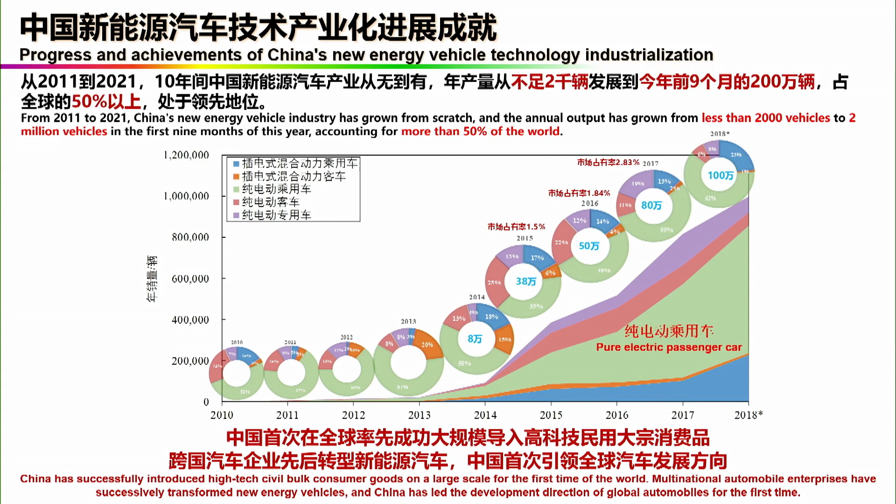So this is what is happening nowadays, and people will ask several questions. The most important question will be how does this happen, or why can this happen in China? What's the internal logic or reason for this? The second question may be, will these successful experiences also be effective in the future for China? And will they be learned or used by other countries in the future? These are very interesting and important topics, and tonight's lecture was prepared facing these three important questions.

Okay, so let's come to the first question. How does this happen? How did new energy vehicle technologies in China develop so quickly? The story goes back about 30 years. In 1992, the first proposal to develop new energy vehicles was made by Dr. Qian Xuesen, who is known as the father of the Chinese aerospace industry. At that moment, he was very interested in developing China's automotive industry. He wrote a letter to the central government to explain why China needed to develop new energy vehicles, electric vehicles, and why this is a chance for us. But at that moment, China didn't have the conditions to develop this technology.

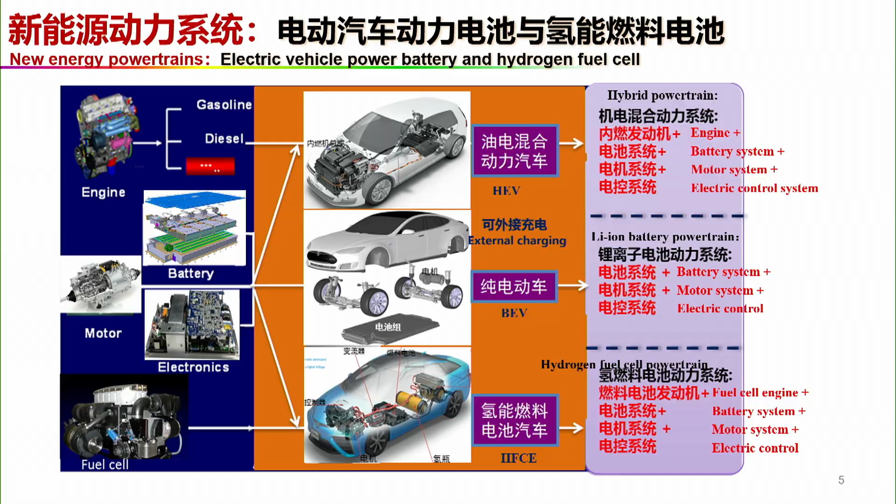In order to answer this question, the central government started several 5-year projects, starting from 2001, corresponding to the 10th 5-year project. After two 5-year projects, at the end of the 11th 5-year project around 2008, all the different kinds of new energy vehicle powertrains were developed and demonstrated in the Beijing Olympic Games. There were hybrid city buses, hydrogen fuel cell buses, and also battery electric vehicles.

All these technologies were compared with each other, and the cost, durability, and reliability were evaluated for market feasibility. At that moment, the results were not very good, because as research projects, all of these had very good results - we can say all the research projects were successful - but it was not mature for market introduction.

The only hope was in battery electric vehicles, because for some other technologies there were very big issues, like hydrogen fuel cell: the cost was still too high, and the durability was short. For internal combustion engine hybrid technology, it needs fuel consumption and cannot achieve zero emission. So the only hope relies on battery electric vehicles.

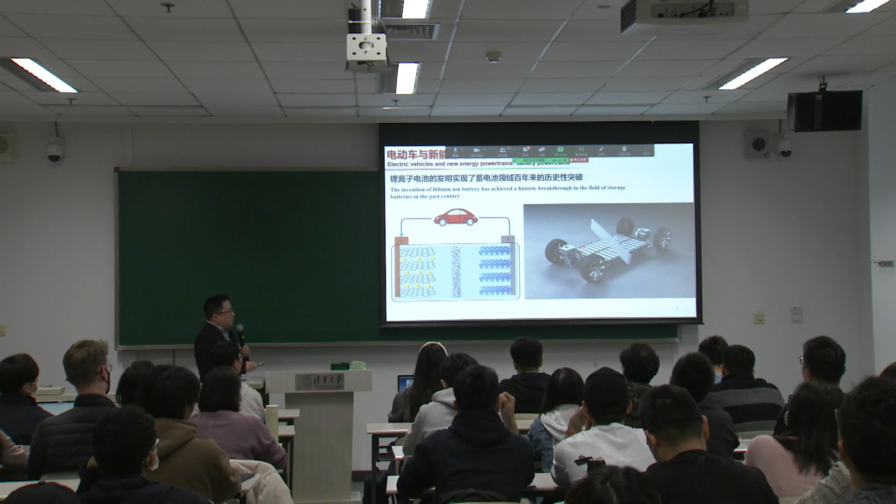On the other side, for battery electric vehicles, the development of lithium battery technology goes very quickly. Here is a video provided by General Motors, and we can see this lithium battery - this is a single cell. Lots of single cells compose a module, and this module can be integrated with the vehicle chassis very well. This technology makes the design of the vehicle very flexible, and also the performance of the vehicle very good. So we can see that the invention of the lithium battery has achieved a historical breakthrough in the field of storage batteries in the past century.

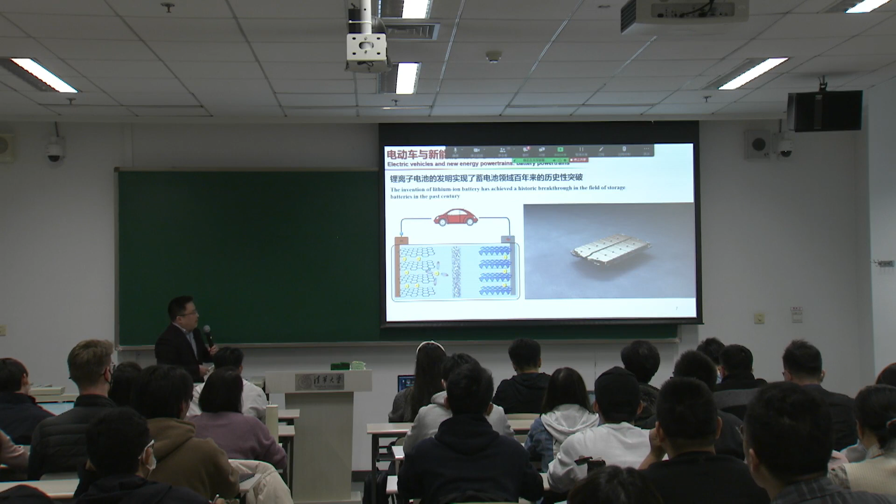This makes it possible to develop new energy vehicles. So in the year 2009, the consulting expert group made several discussions and decided to focus on pure battery-driven technology, which means if we want to develop new energy vehicles, the first or highest priority should be focused on lithium battery and its corresponding pure battery-driven technologies. After that, if we have this very good lithium battery technology, then we can develop hybrid internal combustion engine vehicles, and then hydrogen fuel cell vehicles.

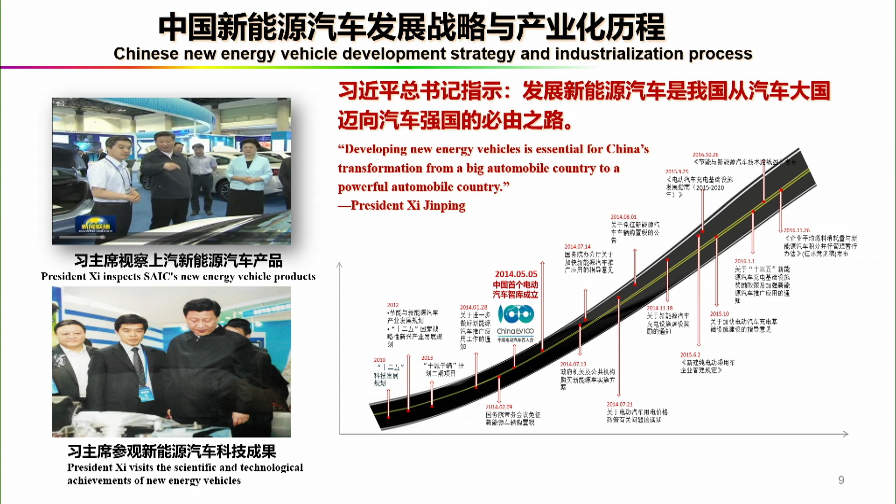This is the decision made in 2009, and after that, the central government and lots of local governments - that means the government for each province or city - provided lots of policy support to support the development of new energy vehicles, especially lithium battery and battery electric vehicles. Then this technology developed very quickly.

Nowadays we can say that in China we have entered the era of electric vehicles, and the development process can be described as starting from two ends, and then going into the market for high class passenger cars. So the market of the electric vehicle can be separated into three parts: one is the large size urban electric vehicles, and the other is the micro-sized passenger electric vehicles.

And for these two parts, Chinese companies have our own advantages, and the competition in this area is not so high. So we suggested the companies enter this market first, and after accumulating experience in technical development, then enter the medium and high class passenger car market. Nowadays in China we see many high performing electric vehicles, such as those provided by XPeng, SAIC, BAIC, Xiaomi, Lixiang, or Weilai. So we can say this strategy has had a very successful result.

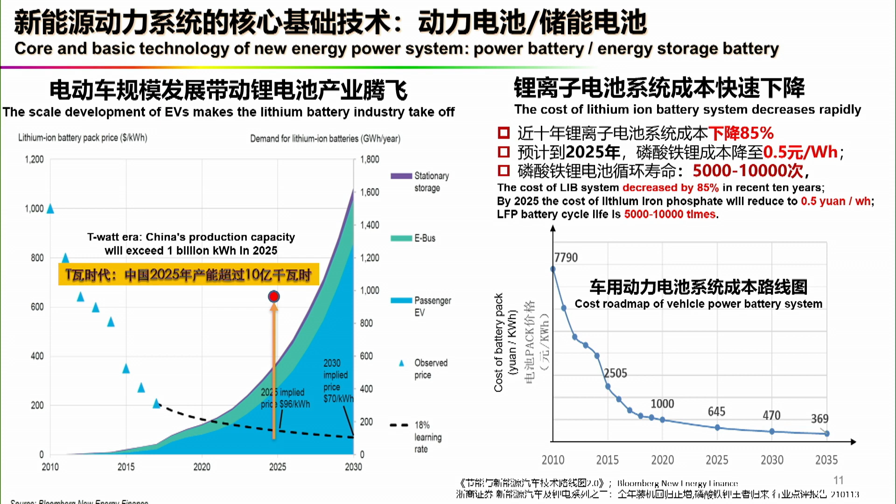Not only has the cost reduced by a very big gap, but also the energy density increases very rapidly. The energy density of the lithium battery itself increased from less than 100 watt-hour per kilogram to more than 300 watt-hour per kilogram. And at the system level, the specific energy increased from around 40 watt-hour per kilogram to about 200 watt-hour per kilogram. This technical development is also amazing.

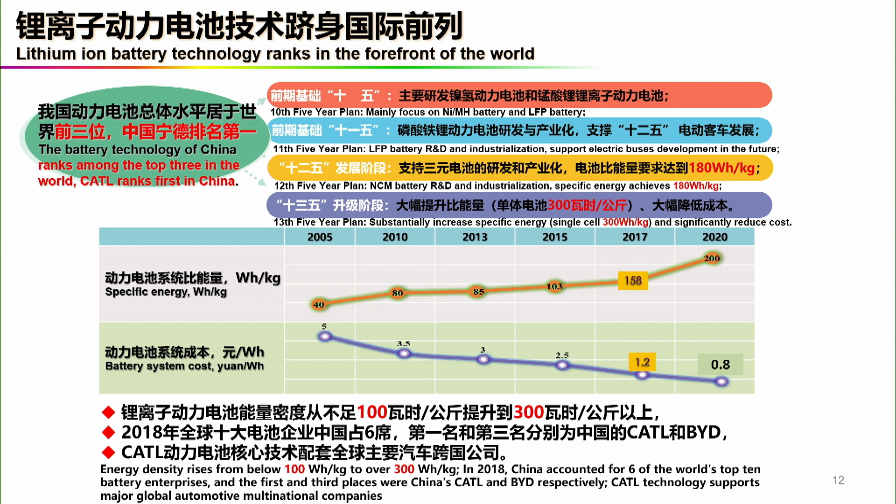So overall, we can say that the battery technology of China nowadays ranks among the top 3 in the world, and the company CATL in China ranks actually first in the world in the battery industry. So this is the achievement of the battery industry.

When we look into the key technologies, or the scientific issues of the lithium battery itself, we can see that the performance for mileage and life have been basically solved. Nowadays, the driving mileage of electric vehicles generally locates around 300 or 400 kilometers up to 500 or 600 kilometers, which fulfills the requirement of daily use.

But there are still several issues that need to be solved. One is thermal runaway for the safety problem. The other is the driving range decline problem in winter. And the third is super fast charging - how to charge this battery very quickly. So our research is also focusing on these several aspects.

When we look into the research methodology, it is also very interesting. At the very beginning, before 2015, almost all researchers in university as well as industry focused on improving or optimizing the material of the lithium battery, so lots of research and development work focused on the material. But after 2018, engineers and scientists changed their viewpoint and started to improve performance from the structure level - combining knowledge from mechanical engineering, electrical and electronic engineering, together with material science, to make new innovations.

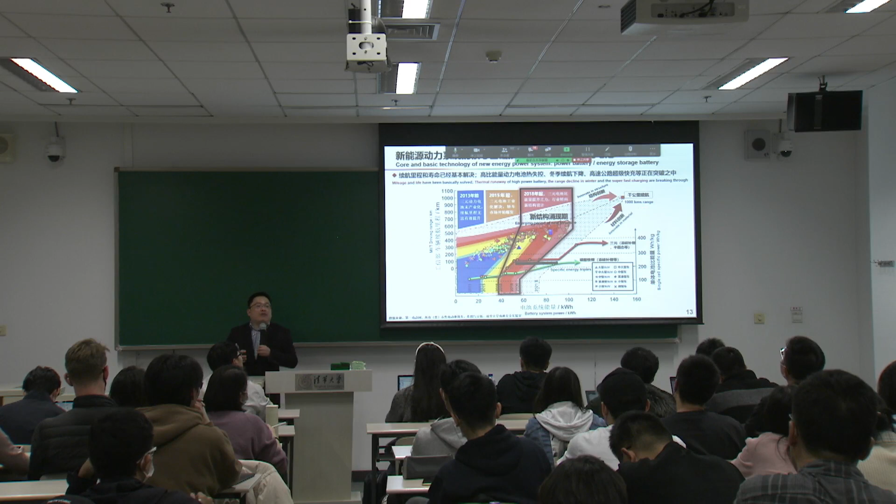Nowadays, almost all research groups and companies use a multidisciplinary research method - using not only material science but also mechatronics systems and artificial intelligence technologies to develop high performance battery systems. The target is to realize a battery system that can guarantee a passenger car providing more than 1,000 kilometers driving mileage, as well as guaranteeing thermal runaway safety and reliability in winter time.

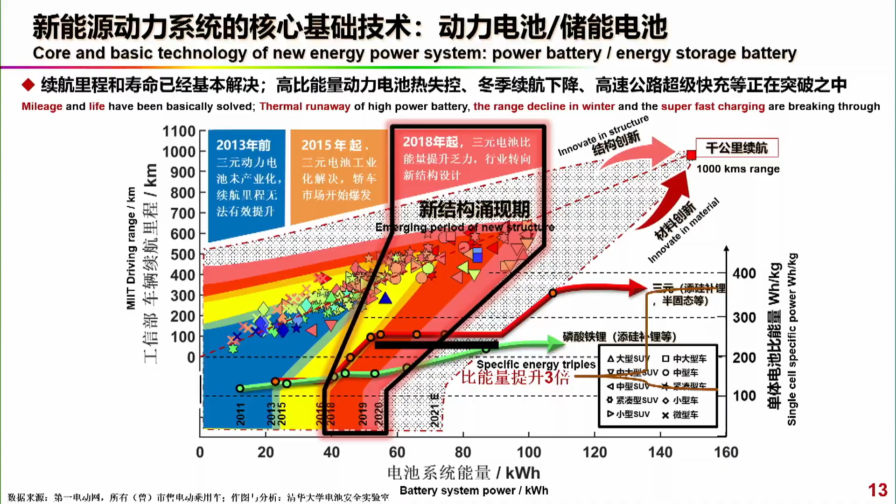One typical research outcome is that we revealed the thermal runaway mechanism of high specific energy batteries. This type of battery is very popular in industry, but people didn't know how the thermal runaway happens. We did research to make this secret open to the public, and we have some publications on it. On the other hand, the battery is of course very important.

But when we want to make the vehicle run, we need very high performance electrical driving systems. So the electrical driving system also developed very rapidly. The IGBT was started to be replaced by SiC, and the volume can be decreased to 1 to 20% of the original design. And also for the whole system design, we start to design the electrical motor, the electrical control unit, the mechanical driving axles, and also even the tire together.

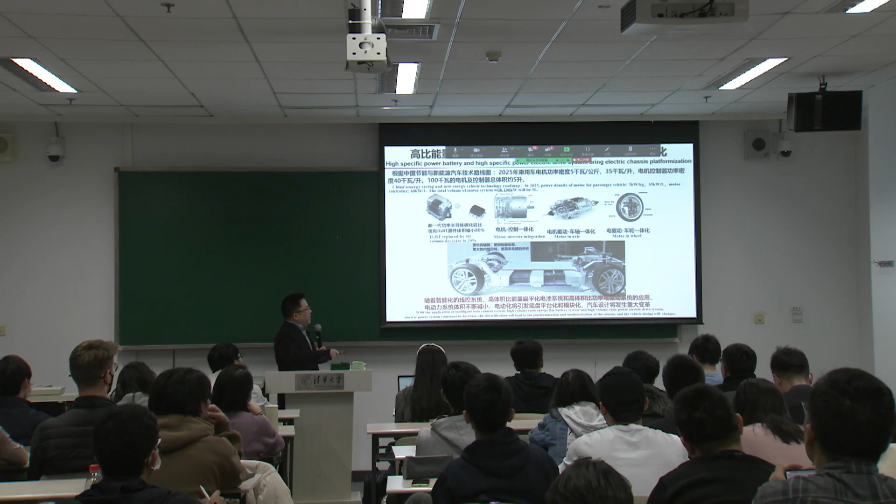And all of these technologies make the driving system very compact, and also make the platformization and the modularizing possible in industry.

And all of these technologies, together with the lightweight design and the intelligent active collision avoidance technologies, allow us to design very high performance and intelligent chassis platforms. And this kind of technology makes lots of possibilities, makes the design of the vehicle very flexible.

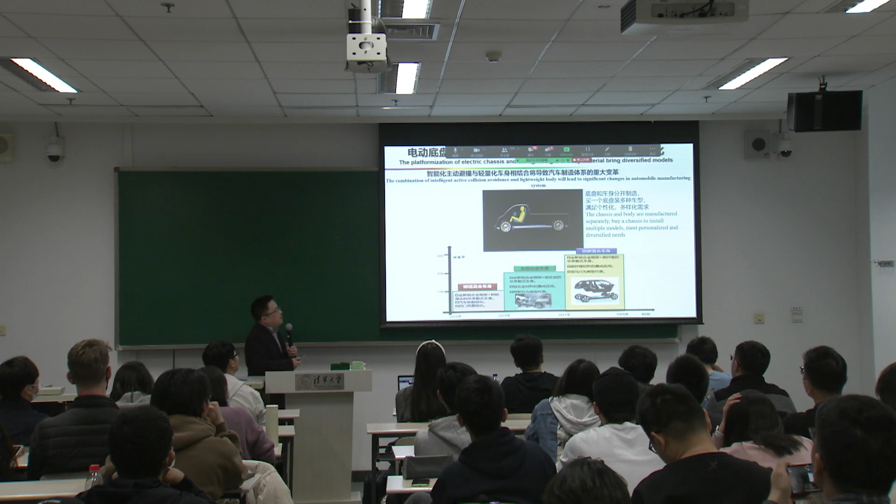That means the vehicle can be regarded as two parts. One is the intelligent electric driven chassis, and the other is the body. And these two parts can be designed and produced separately, and combined very compatibly to form different kinds of vehicles. We think this will make a big change in the future, not only for the automotive industry, but also for our daily lives.

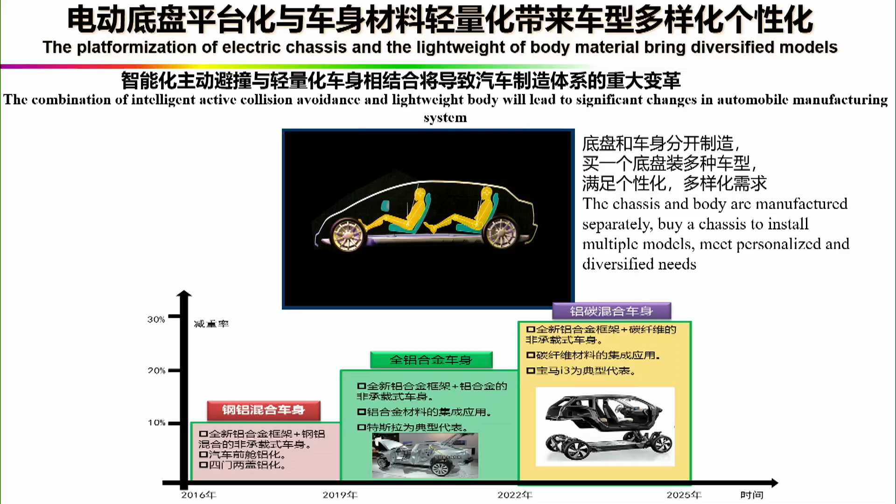In this report, it is predicted that in the future, the sales of new energy vehicles will reach about 40% to 50% of the total sales of automobiles by the year 2030. And by 2040, this number will be over half of the total sales of automobiles, and the number will be beyond 300 million. So this is a very huge number.

Along with the development of new energy vehicles, especially electrical vehicles, the charging infrastructure facilities are also developing rapidly. For charging technology, we have two kinds: one is called slow charge, the other is called rapid charge.

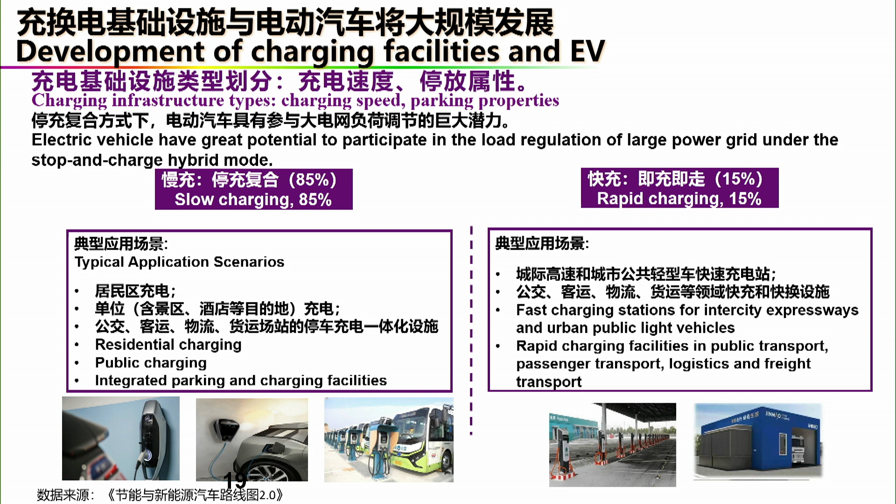Slow charge technology is normally used in residential areas or public working areas. Rapid charging technology is normally used for intercity logistics, public light vehicles, or intercity public connections. Nowadays, slow charge facilities occupy about 85%, and rapid charge about 15%. And all of this information signals a big change in the automobile industry as well as in the energy industry.

When we look back into our history, about 100 years ago, there was a great transformation from horse-drawn carriages to automobiles, and then there was a great boom in the oil industry. Standing at today, we think we may be also at another cross point of technical change.

So what will happen next in the next 20 or 30 years? We think there will be lots of changes in automobiles and also in the energy industry, since the development of the automobile industry is always related to the energy part.

On the other hand, let's have a look at the energy industry. For the energy industry, the target or development constraint is to realize carbon neutrality, or the carbon peak, of the energy industry.

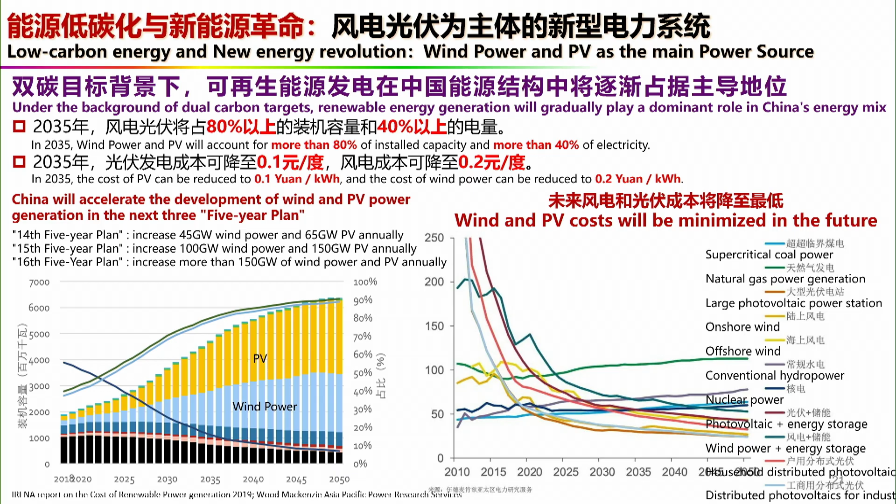Also in that year, the cost of renewable energy — here we mainly consider wind power and PV power — the cost of PV power can be reduced to 0.1 yuan per kilowatt hour, and the cost of wind power can be reduced to 0.2 yuan per kilowatt hour. This number is very low.

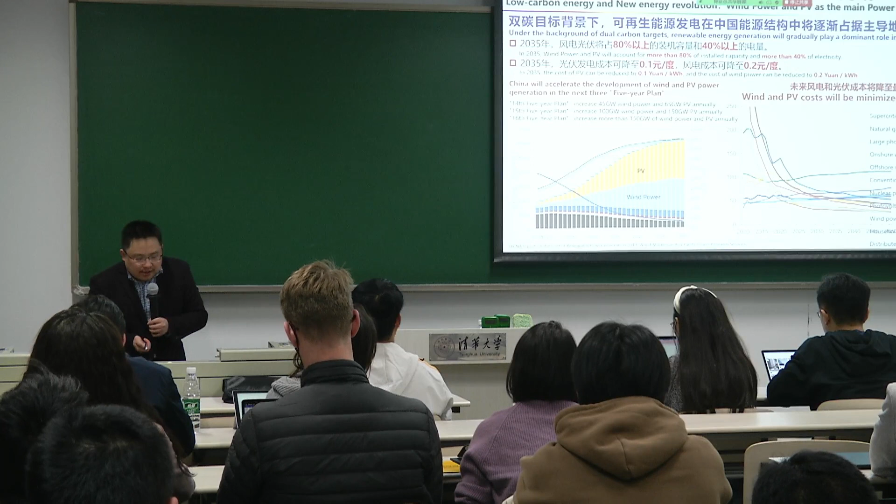That means if we use renewable energy as the original energy source, the cost of fuel, or the operation energy for vehicles, can be almost ignored. This is very good information for our automotive industry.

Based on this result, we can make an analysis of the technical cost with different technical combinations. In this figure, all the energy comes from renewable energy, mainly wind power, solar, or bioenergy.

And the outcome of the powertrain includes the battery electric vehicle powertrain, hydrogen fuel cell electric vehicles, and the traditional internal combustion engine. And here we can see that there are lots of technical roadmaps. The energy comes from the renewable energy. It can go to electrical power, or go to the electrolyzer to produce hydrogen, or combine with some other materials to produce biofuels. And with this electric energy or hydrogen or biofuels or some hydrogen carrier fuels, we can go to different powertrains and have different efficiency.

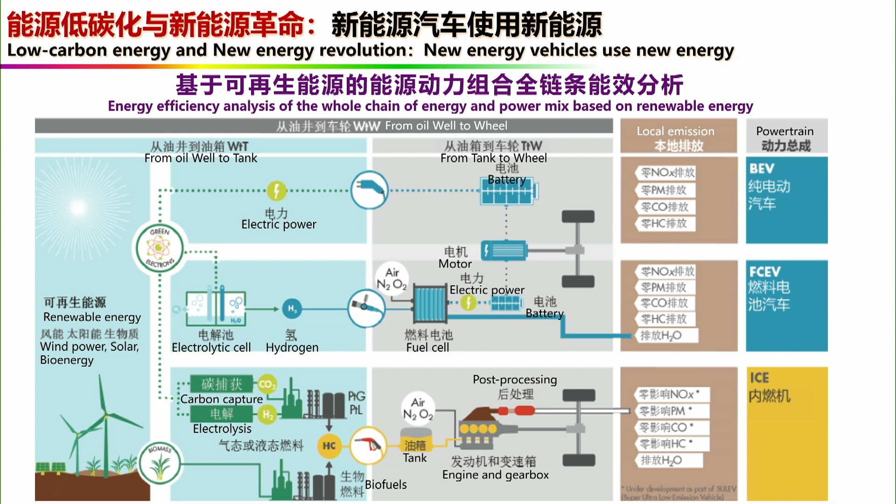There are lots of complex technical roadmaps, and after some calculation, we can have some result of the efficiency. We can see the overall efficiency. This overall efficiency indicates the efficiency of the powertrain from the very beginning, the renewable energy. So 100% of the energy comes from the renewable energy. When we use battery electric vehicles to use this energy, the efficiency is about 77%. When we use hydrogen fuel cell, the efficiency is about 30%. And when we use traditional internal combustion engine, the efficiency is about 13%.

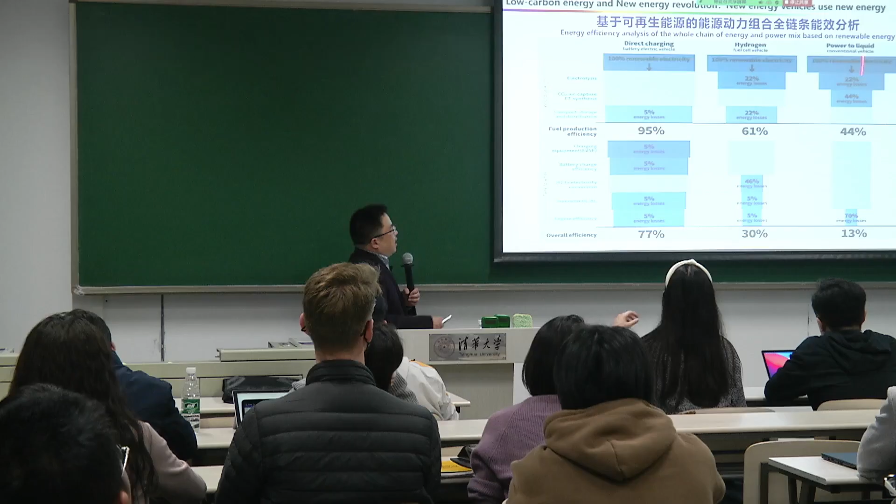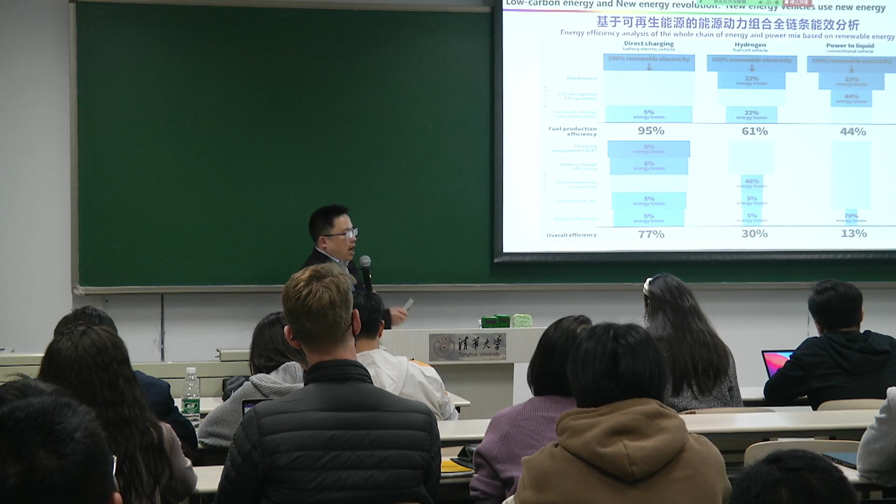So we can see that if we only consider the well-to-wheel efficiency, the battery electric vehicles have a very obvious advantage over other technologies. And the hydrogen fuel cells are worse than battery electric vehicles. But if we use hydrogen fuel cells, they have advantages in driving mileage or the refueling time. But for the internal combustion engines, it seems there's no reason to develop such technologies in the future when we use 100% renewable energy. So this is a major conclusion.

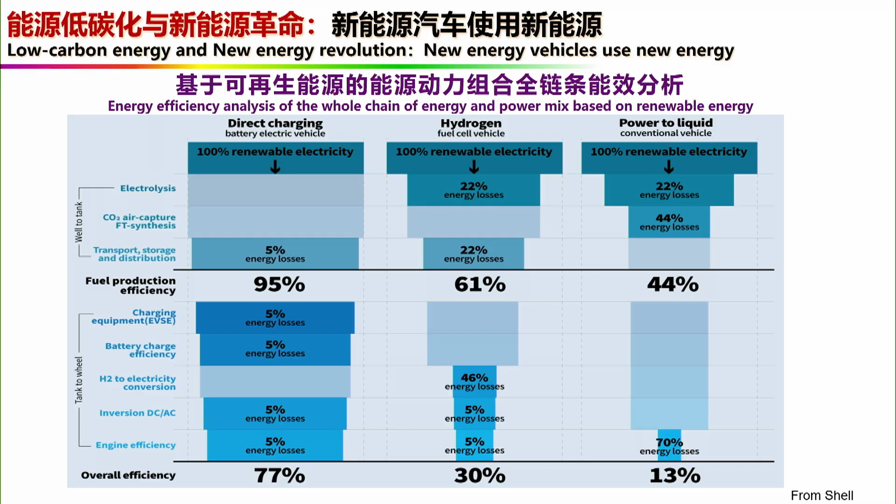So based on this, in our future development, the technical roadmaps are mainly focused on battery electric vehicles and hydrogen fuel cell vehicles. So this is the reason, or the internal logic, why nowadays almost everyone in the automobile industry or the energy industry is discussing electric vehicles or hydrogen fuel cell vehicles.

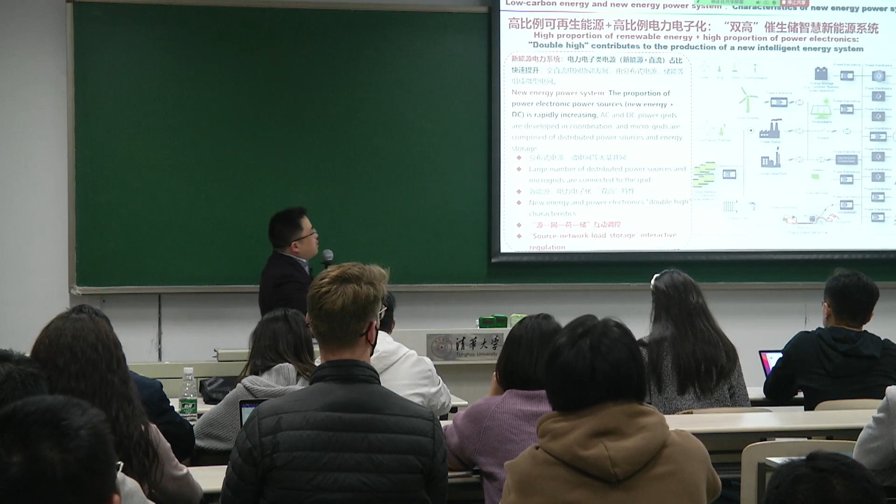Okay, so let's further focus on the energy system. This figure shows the principle of an energy system. It is a little complex, so let me explain a little. On the right hand side is the consumer side. We can see that there are lots of consumers, such as buildings, industry, and other facilities. And on the other side is the power source end, and the major power sources are wind and solar. And there are also energy storage facilities like the battery, the water electrolyzer, and also the electric vehicles. Both battery electric vehicles and hydrogen fuel cell electric vehicles can be regarded as facilities for energy storage.

And for such a complex energy system, there are four basic elements: the power source, the network, the power load, and the energy storage part. These four elements are the basic things that compose this complex network. And for these complex networks, it is necessary to develop intelligent control or intelligent management systems based on big data or faster communication systems.

And when we look into the energy part and go back to history, we can see that nowadays we are at the third energy revolution. In the first energy revolution, the power source of human society changed from firewood to coal. In the second energy revolution, the power source changed from coal to oil and gas. And nowadays, in the third energy revolution, the power source of our society may change from oil and gas to renewable energy. Here renewable energy contains wind power, solar, biofuel, and some others.

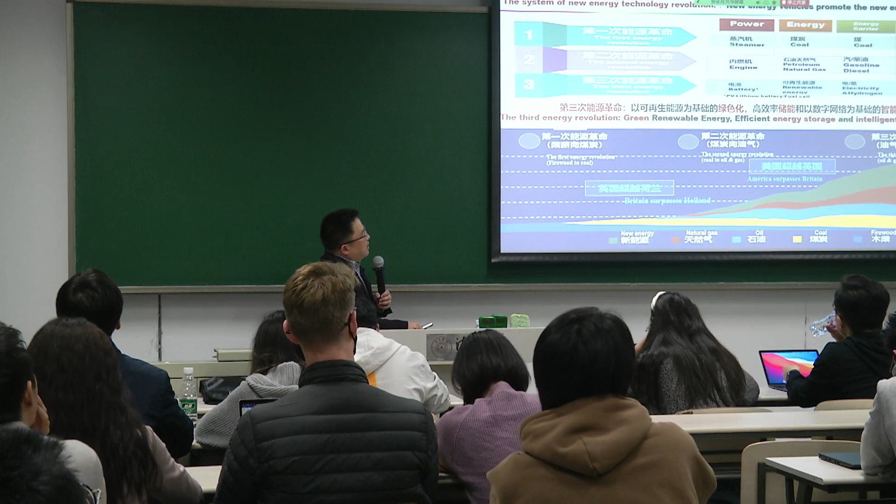And as a basic technology, the third energy revolution contains three parts. One is green renewable energy. The second is efficient energy storage technology. And the third is the intelligent digital network. When we go further, we can see there are more elements.

We call it the 5 pillars of the new energy revolution. The first is renewable energy as a power source. The second is that energy production or energy consumption changes from a centralized style to a distributed style. That means the coordination technologies become much more difficult.

Third is we need to use hydrogen or batteries to store the intermediate energy, and the fourth is we need to develop the energy internet technology. That means to distribute or connect and coordinate the energy production and consumption.

And the fifth, which is also very important, is that battery electric vehicles will be regarded as an energy consumer and also as an energy storage for the energy grid. So this is the basic idea.

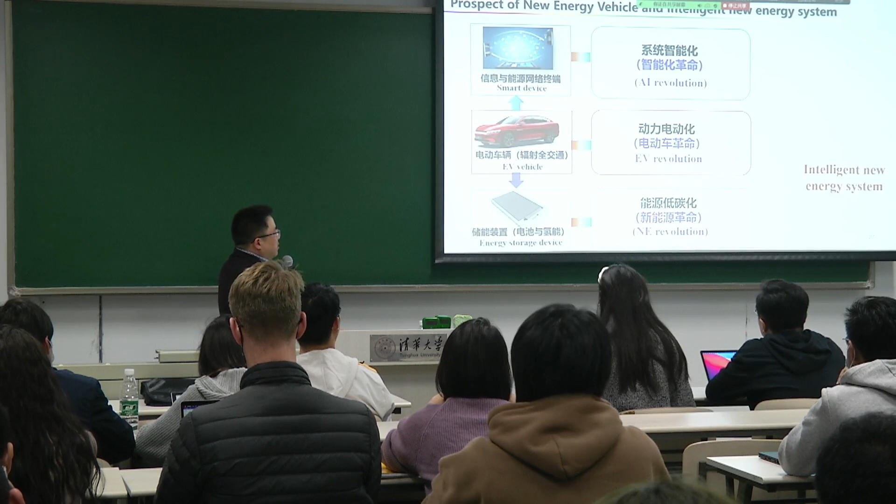Because the electric vehicle revolution contains the power technologies and also the artificial intelligence technologies. And electric vehicles can also serve as battery storage in the new energy system, so it is also an element of the new energy revolution.

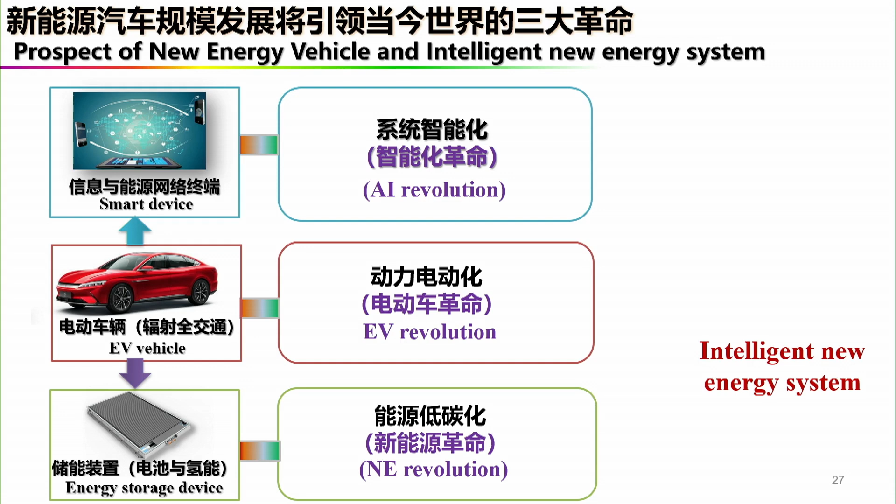And in the control, coordination, or information level, there is the artificial intelligence revolution, which also influences the electric vehicle revolution and the new energy revolution. So these three revolutions combined together, we call it the intelligent new energy systems.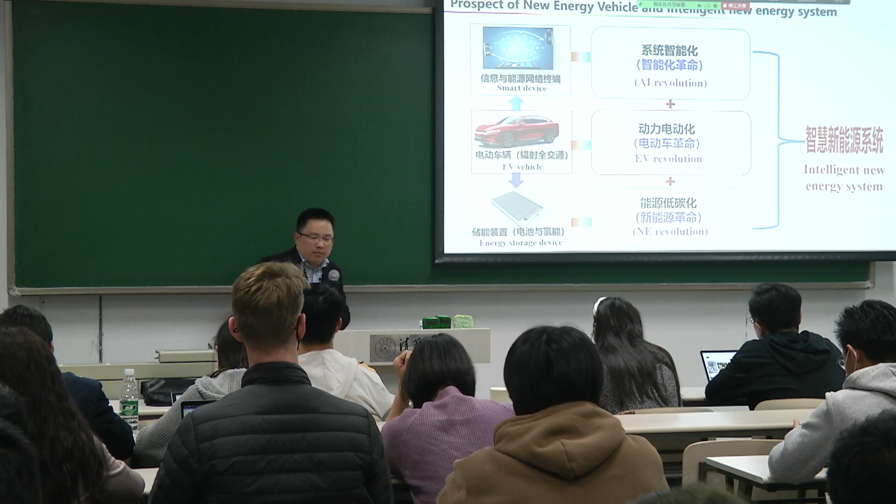The outcome of all the revolutions together is intelligent new energy systems for everything, for the transportation system as well as for the whole society. So this is what we think will happen by 2030 or even longer in the future.

The second part is battery energy storage and vehicle network integration. As mentioned above, among the three revolutions, the electric vehicle revolution is the center, and battery technology is the center of the electric vehicle. So the battery, or energy storage technology, is a key point.

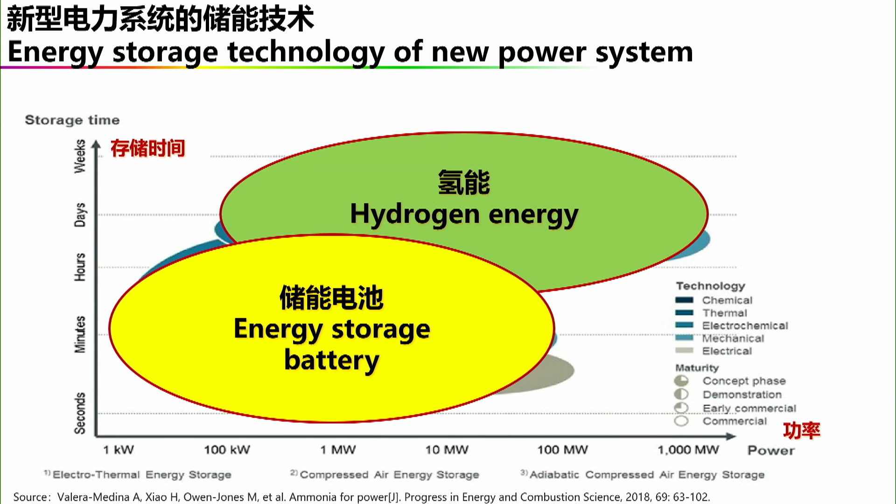There are lots of energy storage technologies nowadays, like lithium batteries, flow batteries, hydrogen, and other technologies. When we focus on electrochemical technologies, there are two major kinds: energy storage batteries and hydrogen energy storage. They have their own characteristics, are highly complementary, and will become the main method of energy storage in the future.

These two can be named electrochemical energy storage technology, but there are still some challenges. One is the cost; the cost of electrochemical energy storage is still high. The second is safety. Here we provide two videos of accidents which happened in China several days ago, and we can see that they were very serious.

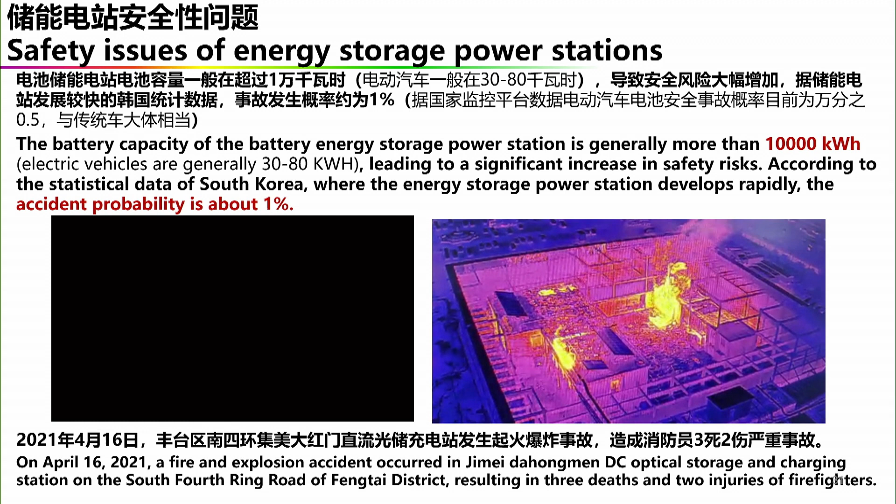So based on these two technical challenges, there's the idea of V2G, vehicle to grid interactive energy storage technology. That means using the battery in electric vehicles as a movable, portable energy storage device. This is the basic idea.

The possibility of this technology is that, based on our statistical results, more than 90% of personal cars are parked and not used, and the batteries inside these cars can be used as an energy storage system for the energy grid. That's the basic idea.

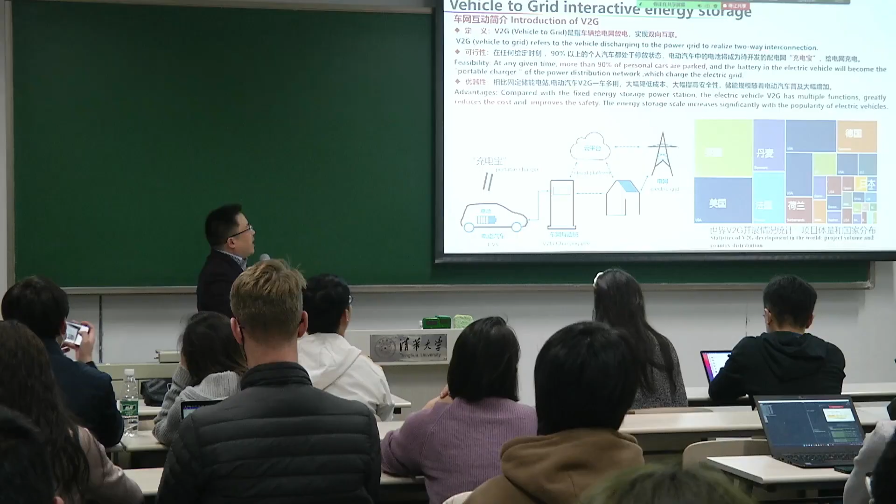By using this technology, we can greatly reduce the cost of building fixed energy storage stations, and also improve safety, because each vehicle has a battery management system that monitors the state of the battery, and the safety of the battery inside the vehicle is much higher than that of the battery in a fixed storage station. So this is the basic idea.

And how does this happen? Here is a basic idea of this technology. On these two curves, there is the curve with the blue shadow, this line.

This line is the power requirement, the traditional power requirement without electric vehicles. So normally there are two peaks. One appears in the morning, and the other appears at night before people go to sleep. And based on this, we can use the battery electric charging and discharging power. We can add this battery charging and discharging power onto this curve.

And the precondition is that if the battery charging and discharging behavior is not suitably controlled, the peak will get much higher, and the lower part will get much lower. So this is a negative thing.

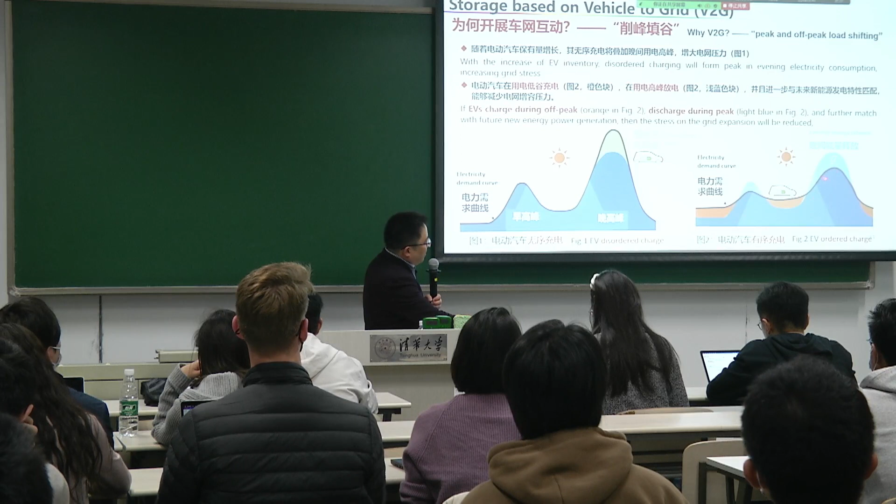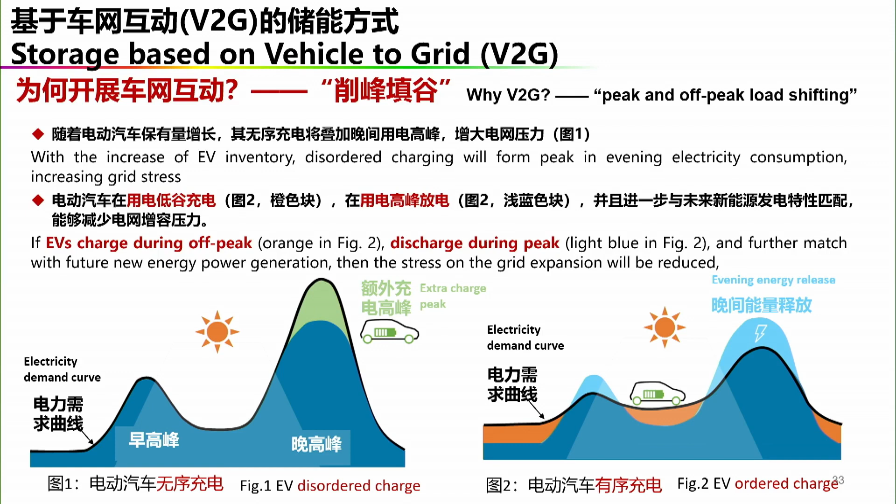But if the charging and discharging behavior can be coordinated, or controlled, or managed suitably with some intelligent technologies, then the peak can get lower, and the valley part can get higher. That means the electrical power requirement curve can be much flatter, and this is very desirable for the energy grids. So this is called disordered charge and ordered charge.

And for more details, there are some calculations reported by an England report, and they give this result. This result showed that if all the electric batteries are disordered or not coordinated, when the number of electric vehicles increases, we need to increase the charging and discharging power of the national grid. This is almost unacceptable, because a larger power means bigger charging and discharging facilities, larger charging and discharging current, more cost, and much lower safety.

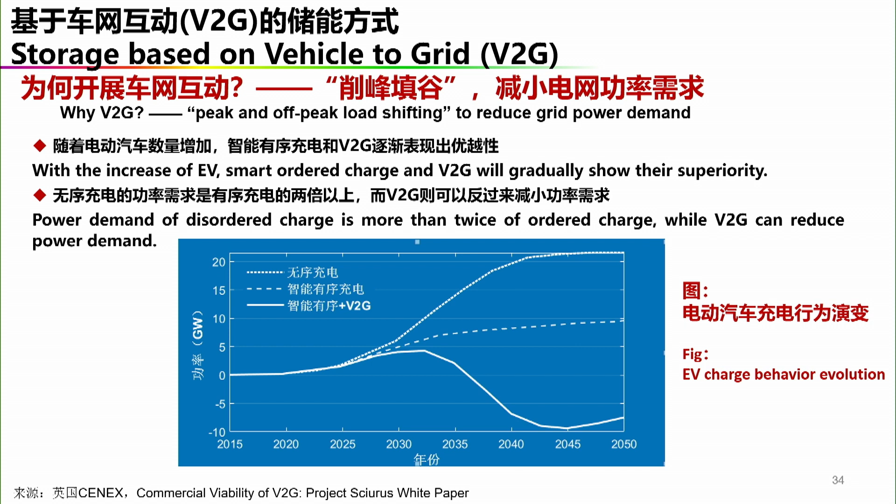But when we use the intelligent ordered charging technology, this power can be reduced. When we use V2G technologies with this intelligent ordered charging, the power requirement of the energy grid may even be reduced. So all of these can be realized based on big data and intelligent technologies. So these are the advantages of this V2G interactive charging technology.

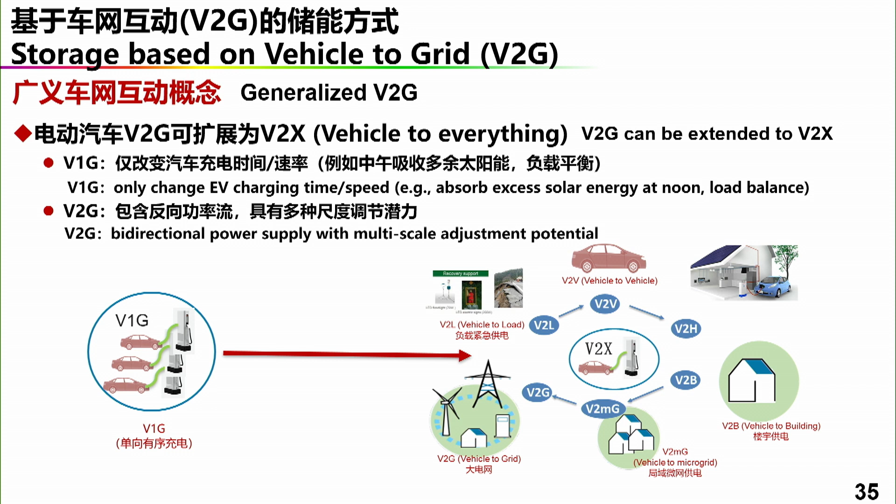And this idea can be generalized to other parts. For example, we start from V2G, and then we can develop V2V, vehicle to load, vehicle to home, vehicle to building, vehicle to microgrid, and vehicle to grid at the national level. So there is lots of innovation space, lots of chances to do scientific research and also to do innovation in industry.

And here is the comparison of battery energy storage technology, where on one side we use the fixed battery energy storage system, and on the other side we use the electric vehicle as the battery energy storage system. We can see that the capacity of these two is similar. But with electric vehicles, we don't need extra investment to build fixed storage stations, and the charging time of the fixed storage station is fixed.

But for battery electric vehicles, it needs flexible, intelligent charging time. And for the building space, the fixed BESS requires some space to store the fixed battery. But for the EV BESS, there's no requirement for space and no requirement for new investment, and the safety risk is much lower.

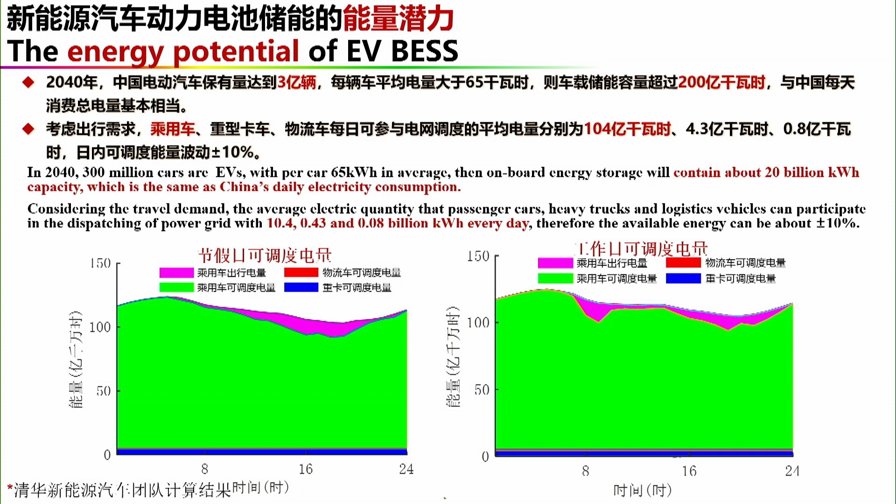at that time. So that means if we use these intelligent systems to coordinate the electric vehicles all over China, the discharging energy can provide daily use. That means in an ideal situation, there's no need for renewable energy production. That's the ideal situation.

And on the other side, this technology has very great power potential. Based on one estimation for the situation in 2021, for example, Beijing has about 500,000 EVs, and with this number, the power support of EVs can reach about 7 million kilowatts, which is 1/4 of the maximum load of Beijing this year.

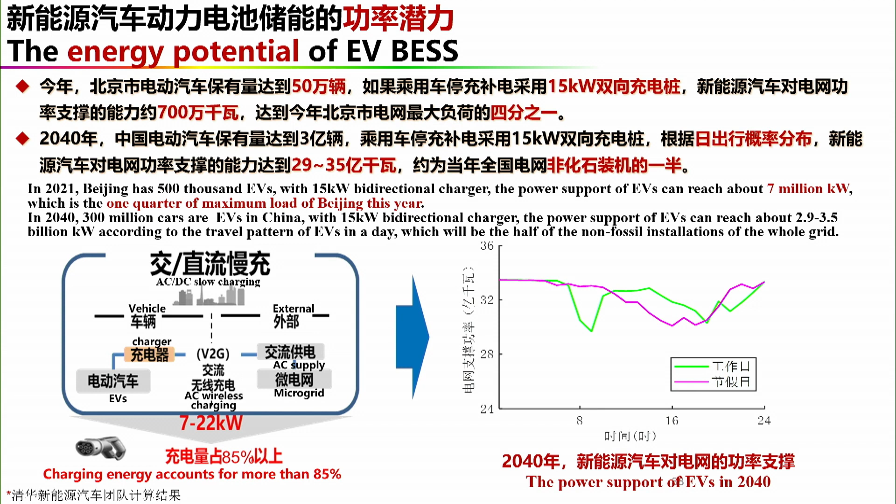That means if we use the electric vehicles nowadays in Beijing, the battery, as a power source to provide power to the grid, then about one quarter of the power can be supplied by the energy from EVs, and the power supplement of the grid can be reduced by one quarter. So that also means we can reduce the investment of the charging facilities by about 1/4. It's a very big number.

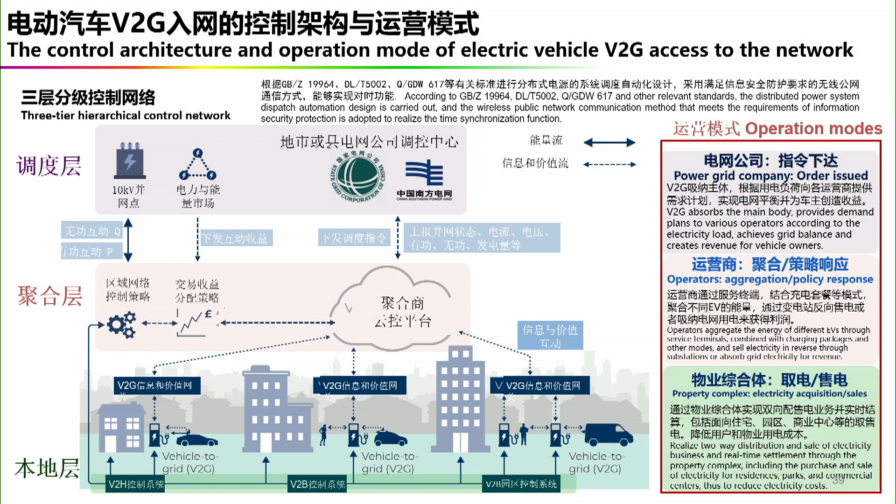Okay, so how can this technology be realized? This gives a basic idea. Normally we can separate this technology into 3 layers. This is a local layer which deals with the interactive charging and discharging facility activities, and the other is the aggregation layer, which combines different information together and realizes some algorithm to decide which vehicle needs to discharge to the grid, and which vehicle needs to charge from the grid. And on the top is the coordination layer, which collects all of the data from different agencies.

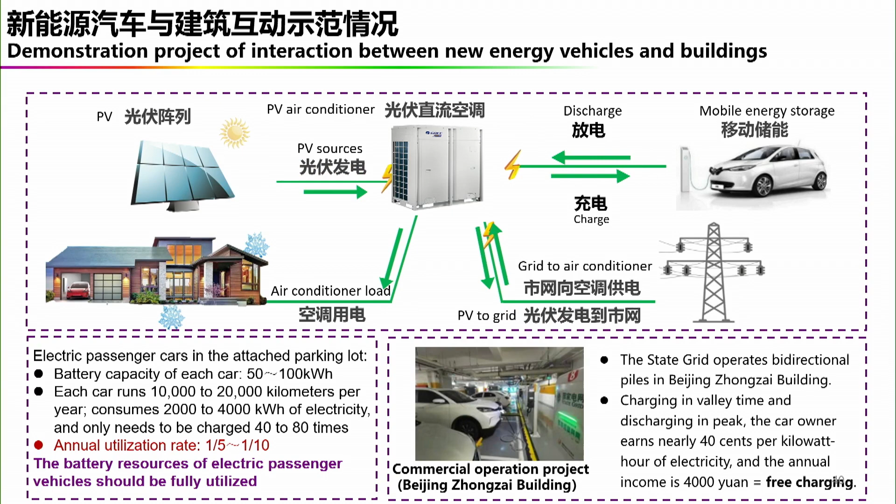And also we started to do some demonstration projects in China. This is a project in Beijing around Zhangjiakou. So in Beijing, in Zhongzai building, in this figure we can see that we combined the PV power, the mobile energy storage, the national grid, and the building together to have a flexible energy distribution system.

And later I will shortly introduce the hydrogen and fuel cell technologies. As we all know, as introduced just now, the third energy revolution contains 3 key technologies. One is green renewable energy. The second is energy storage technology. The third is artificial intelligence technology. And for energy storage, there's battery storage and also hydrogen storage. Now, hydrogen storage is also very important.

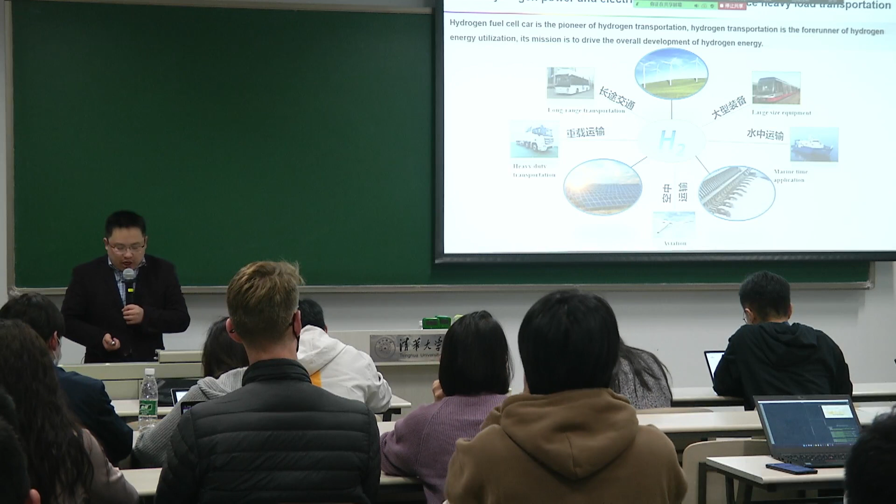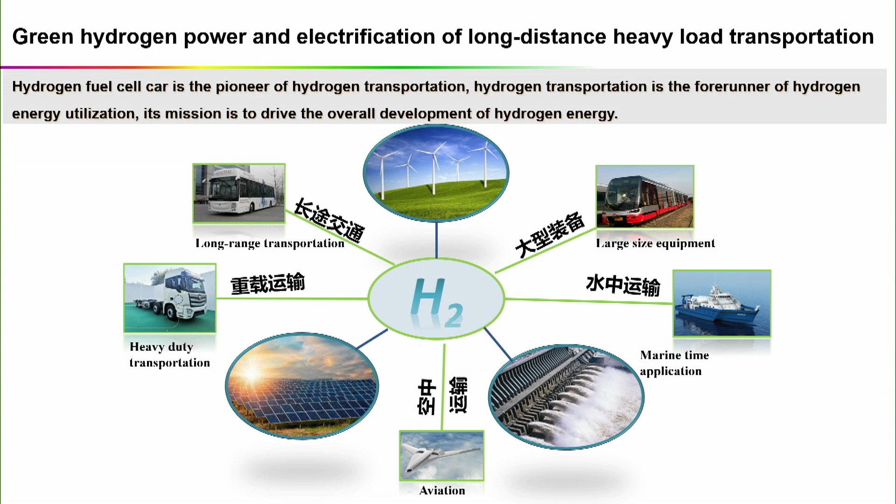And hydrogen will be used in lots of aspects. For example, heavy-duty, long-range driving situations like heavy trucks, trams, boats, and also aviation. For hydrogen technology, there are two aspects. One is the fuel cell technology. The principle of fuel cell technology is to change the energy in hydrogen into electric energy, and in the automotive industry we call it the fuel cell engine.

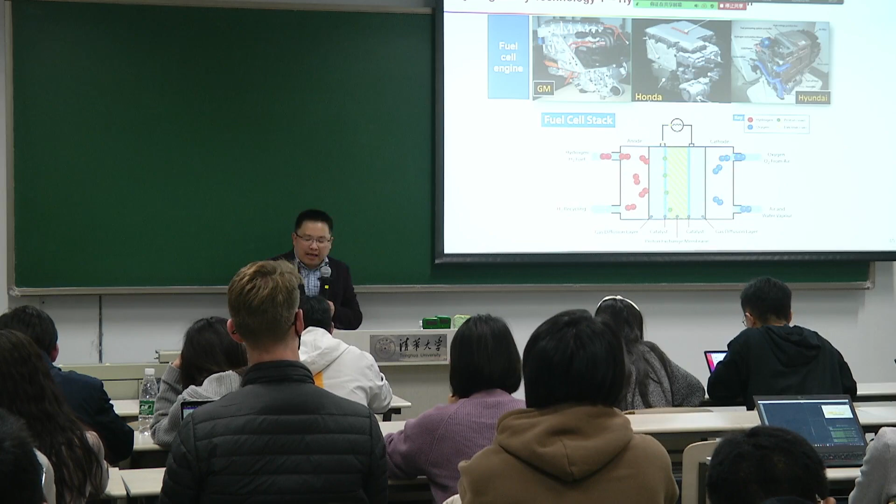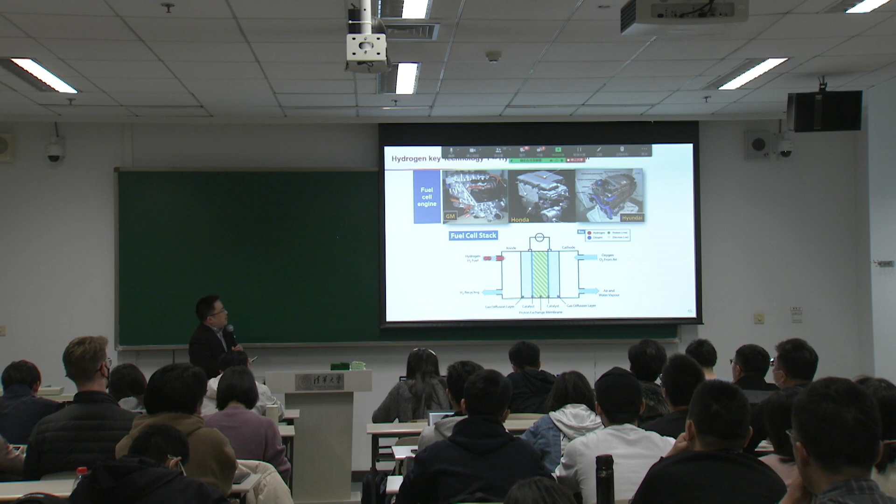Why is it the fuel cell engine? Because it looks very similar to the internal combustion engine. The core inside the fuel cell engine is the electrochemical reaction cells, and the balance of plant of this fuel cell stack contains the air supply system, the hydrogen supply system, and the cooling system, which is very similar to the internal combustion engine. And here we can see some examples provided by General Motors, Honda, and Hyundai.

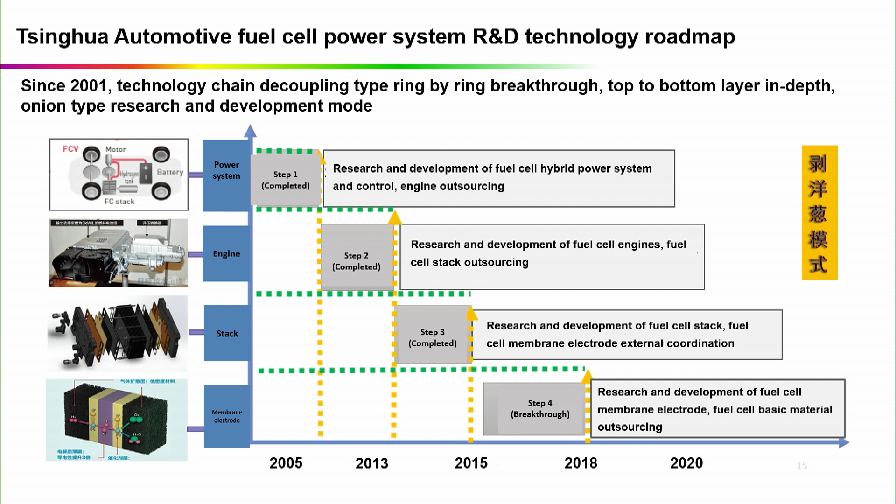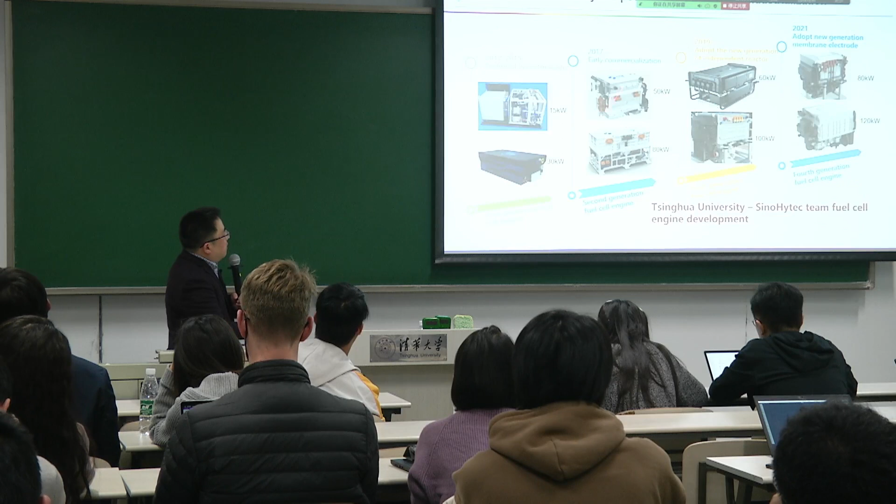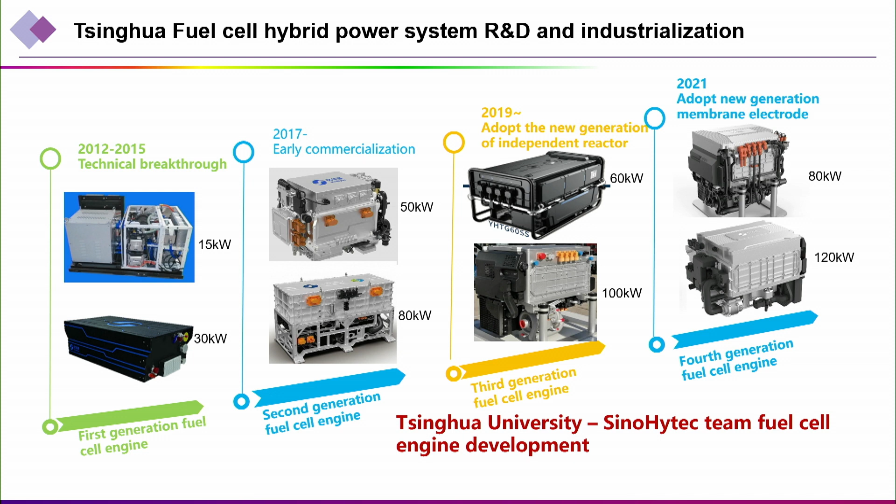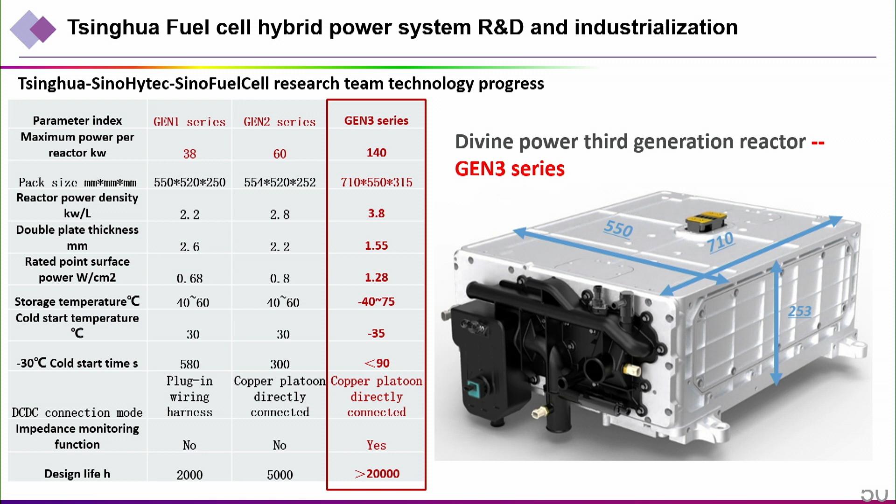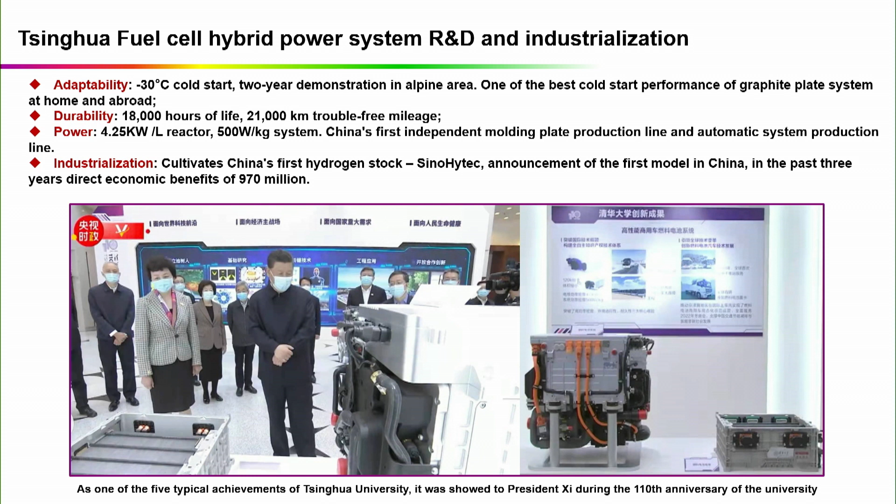So we developed 4 generations of fuel cell engines with SinoHytec and group, and also we developed advanced fuel cell stack with SinoFuelCell company, and the performance of this GEN3 series is very close to the top level internationally. Also, these technologies gained attention from President Xi, and this technology has highly positive comments from the central government.

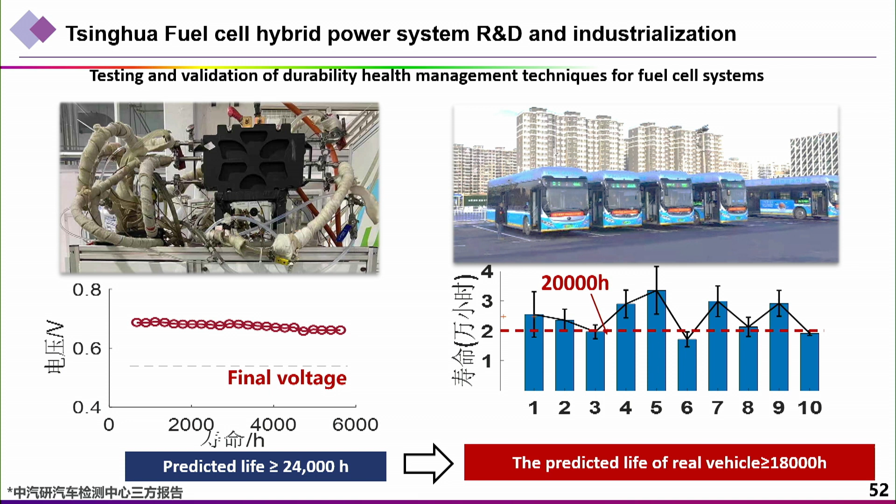And nowadays, the durability or the working lifetime of the fuel cell system exceeds 10,000 hours, and in some cases it can even reach 20,000 hours. That means this technology, in terms of durability, can be used in automotive applications.

Later in the Winter Olympic Games, which will happen very soon, in several months, there will be a hydrogen and fuel cell demonstration project. There are several areas where we build lots of hydrogen refueling stations, and there will be around 1,000 hydrogen fuel cell vehicles operating in this area, on the routes between Beijing, Zhangjiakou, and

some areas. And in the future, it is predicted that the cost of the fuel cell system in the next 5 to 10 years will reduce 80%. That means the total cost after 10 or 20 years will be 20% of the cost nowadays. And this process is very similar to what has happened with the lithium battery in the past 10 years.

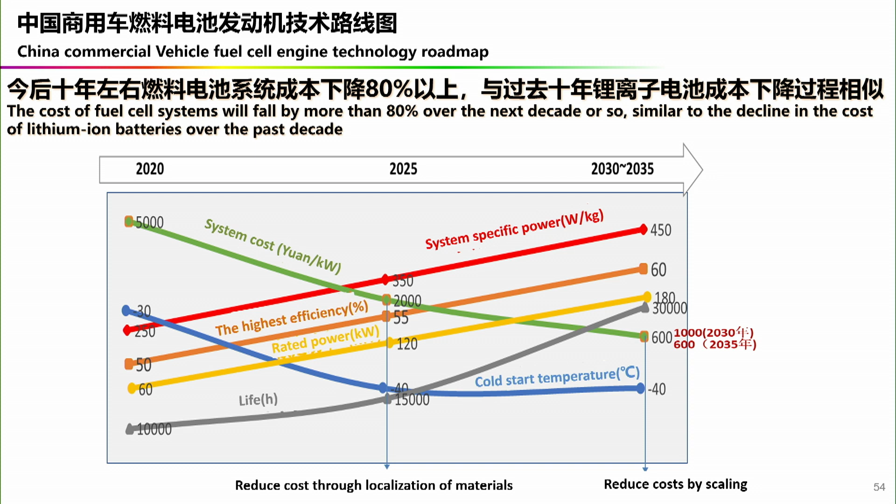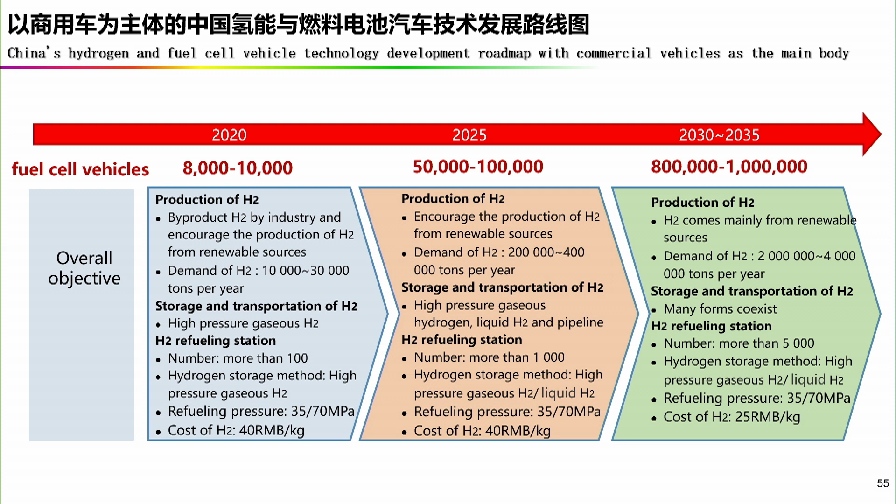And this is our very rough prediction of fuel cell development in the next 5 to 10 years. And we think in the next years there will be a very big jump in the number of fuel cell vehicles, as well as hydrogen charging stations, and also the cost will be greatly reduced, and all the performance indices will be greatly improved.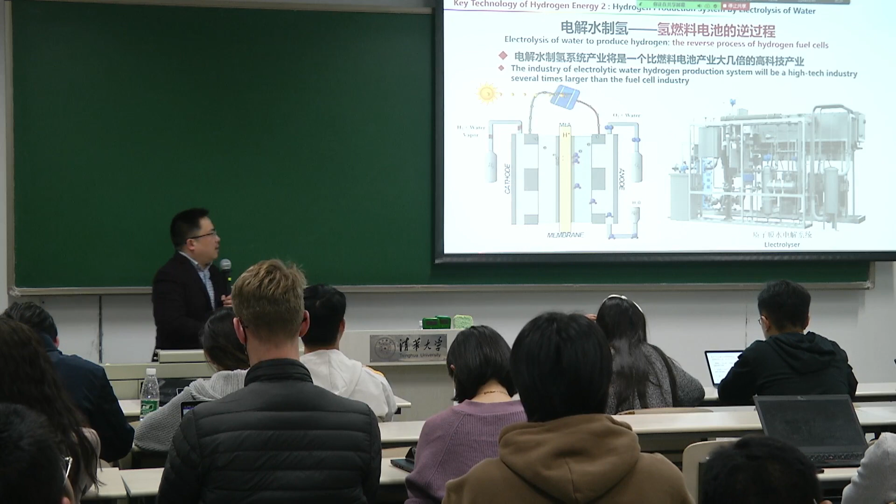On the other side is the technology of the water electrolyzer. A water electrolyzer can be regarded as an inverse process of the fuel cell. In the fuel cell, hydrogen and oxygen meet together to produce electric energy and release heat and water. In the water electrolyzer, we feed the system with electricity and water, and the outcome is hydrogen and oxygen. So this technology can be regarded as storing electric energy in oxygen and hydrogen.

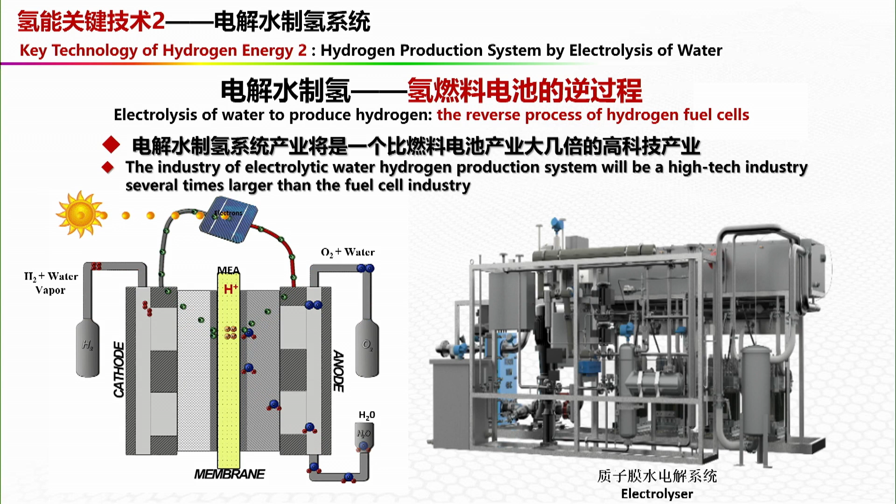And on the right hand side is a prototype of the electrolyzer. For this technology, there are several sub-technologies, like alkaline electrolysis, proton exchange membrane electrolysis, and the solid oxide electrolysis cell. Each technology has different properties in dynamic response behavior, and also in cost and life.

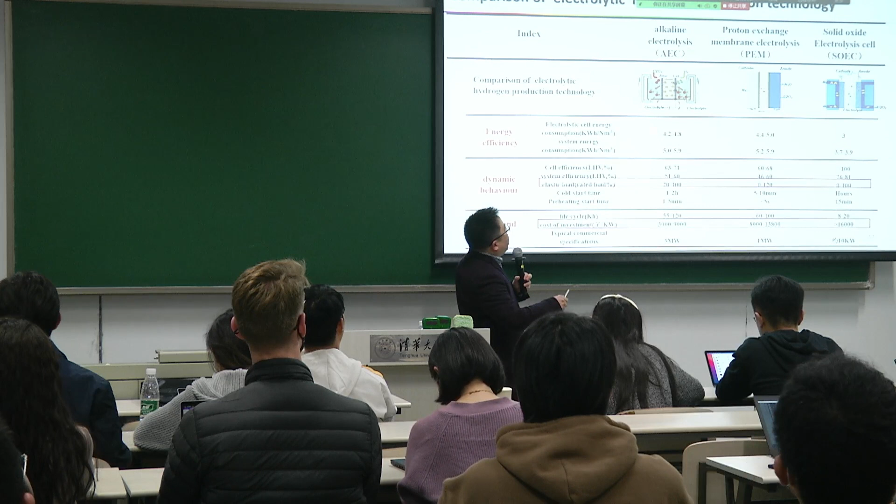Currently, we can see that alkaline electrolysis has relatively lower cost and relatively high durability. But for all of these technologies, durability is the common challenge. In the future, the durability needs to be improved and the cost needs to be reduced.

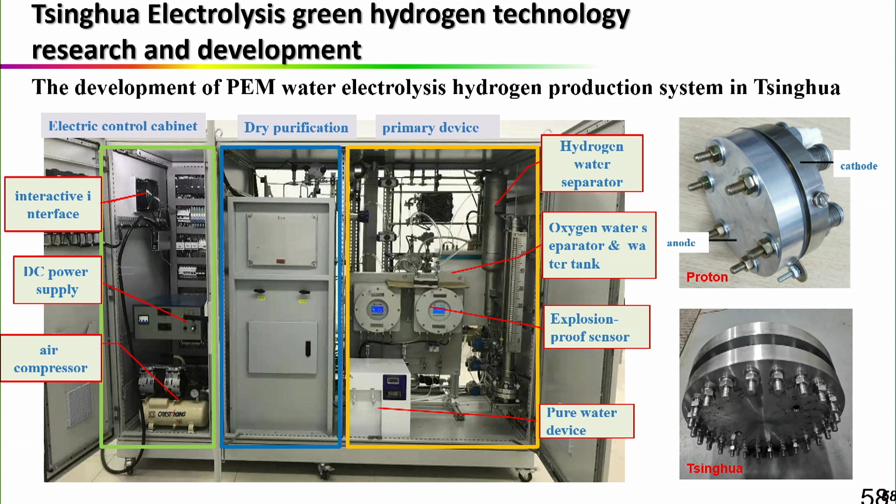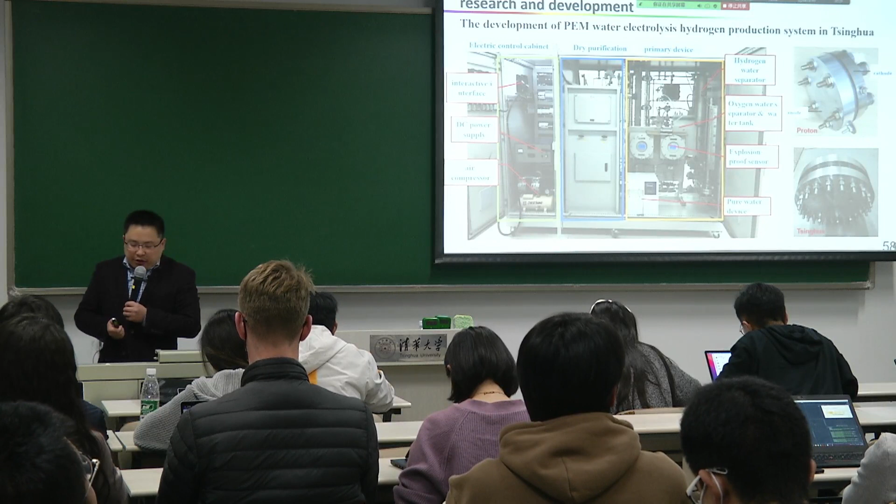And in Tsinghua, in our research group, this is the prototype which was designed by our research group and produced with cooperative companies. It is the PEM water electrolyzer, which can produce hydrogen. And also we developed another prototype of the SOEC, the solid oxide electrolyzer cell, with some Chinese cooperative companies.

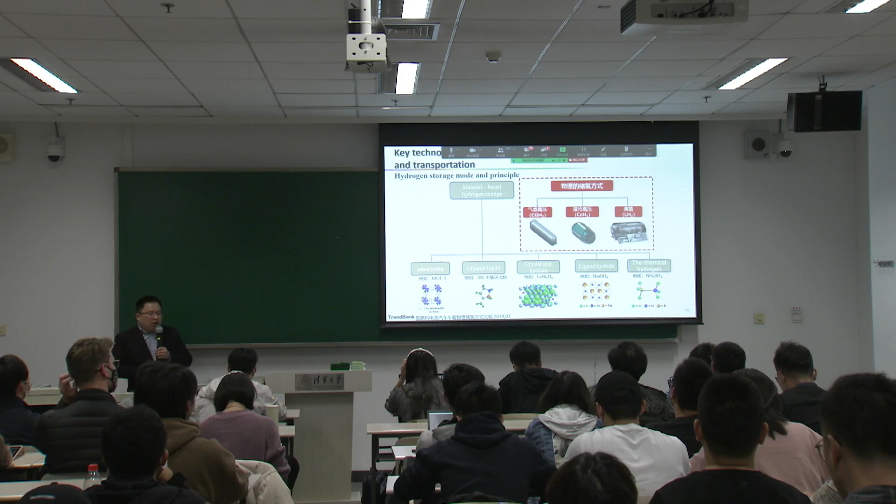And also there are lots of technical tools for hydrogen storage. It can be stored as highly compressed gas, with 700 bar or 350 bar, or as cryo-compressed hydrogen, and it can also be stored as liquid hydrogen. Hydrogen can also be stored with material-based technology, like the following technologies.

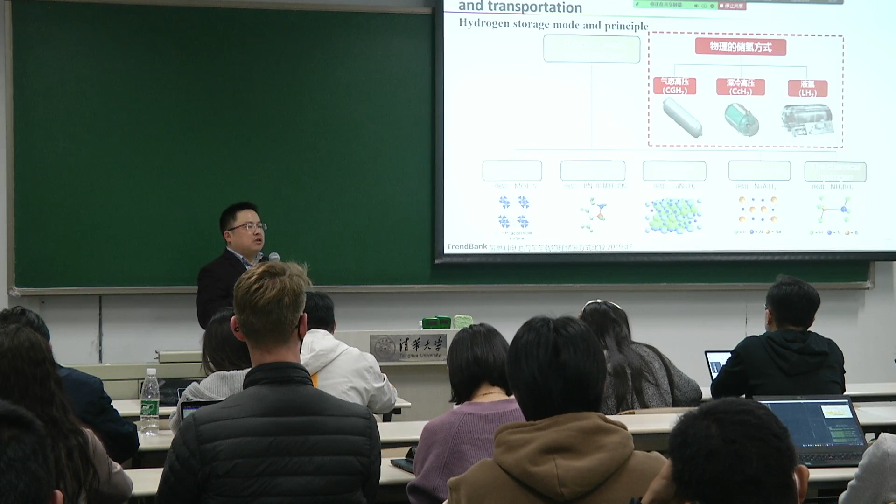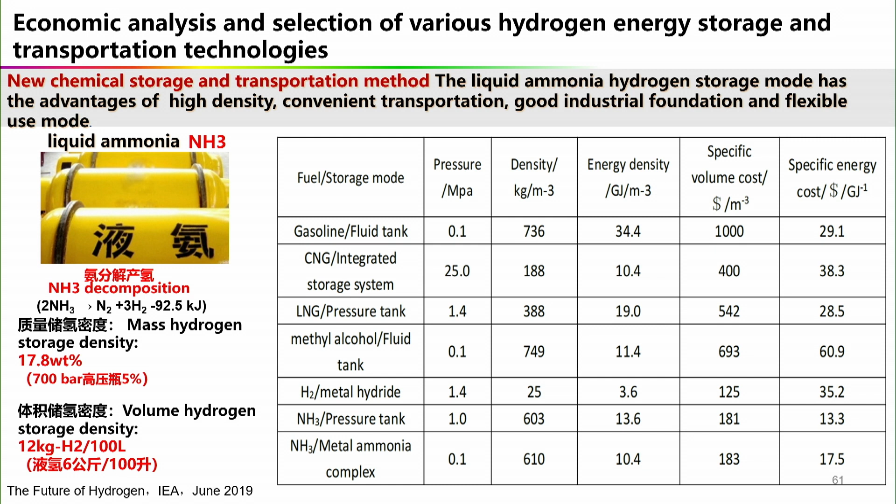So nowadays, in this part, there are also different technical roadmaps on how to produce hydrogen, how to store hydrogen, and how to distribute hydrogen. Another very good technology for hydrogen storage is to use ammonia. Ammonia is also very important, and this technology is highly developed in foreign countries, such as Japan, Europe and the US. We think ammonia has very good advantages in energy storage density and especially its cost.

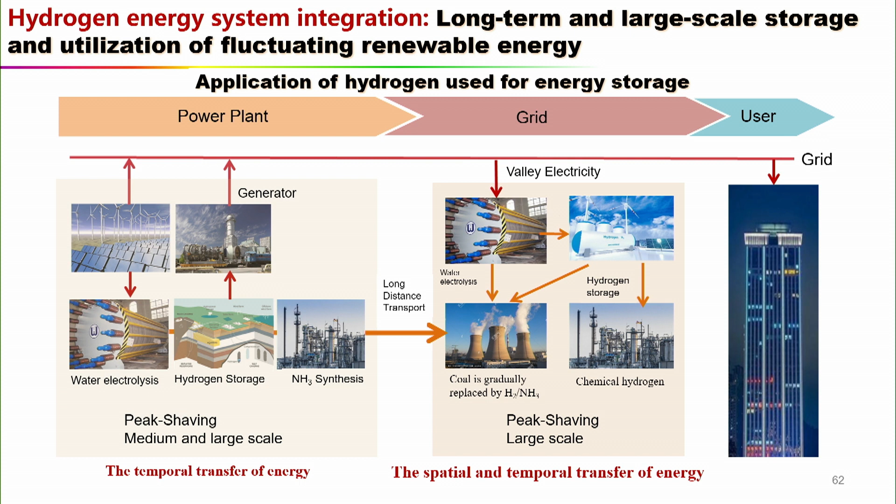So in China nowadays we are comparing different technical roadmaps for hydrogen to find the most suitable one for China for the hydrogen and fuel cell industry. And as a result, we can see that hydrogen is one of the best choices for long-term and large-scale renewable energy storage.

Why? Because it is adequate for energy utilization. That means the storage efficiency is very high. The second is the price is relatively lower than the battery storage system. And also it is complementary with battery storage systems, and the production, transportation, and storage is very flexible.

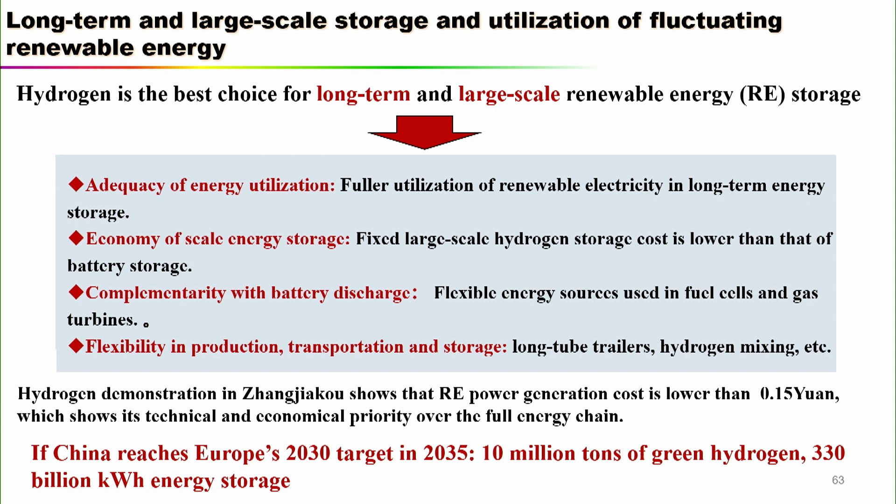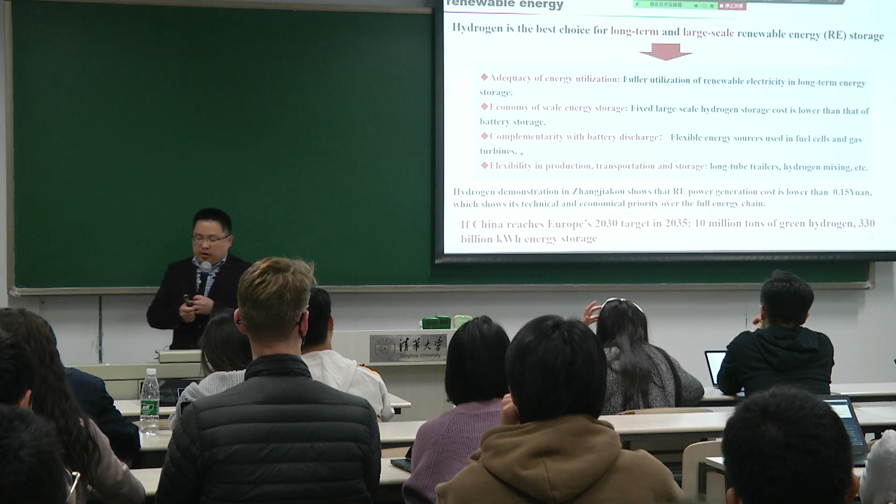It has different technical roadmaps, and on the other side, there are also technical issues of hydrogen production, storage, and distribution, and there's lots of work that needs to be done in the future.

For this part, there are also different demonstration projects in China to compare different technologies. For example, this project is in Zhangjiakou, where we combine the technology of new energy vehicles, including battery electric vehicles and hydrogen fuel cell vehicles, together with hydrogen refueling stations and battery charging stations, and also wind power and PV power as renewable energy, to evaluate the technical cost and life cycle cost of different technical roadmaps.

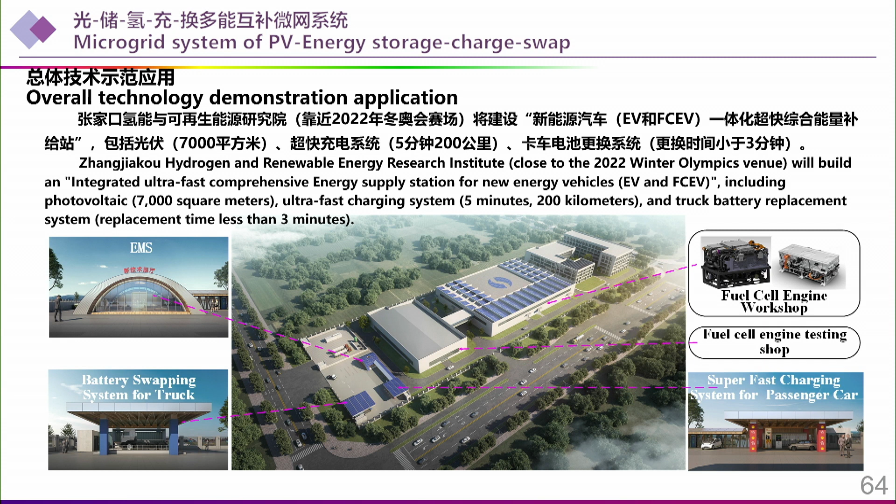And maybe after several years, we will find a relatively good solution for future development.

The fourth part is new energy science and technical research and development in our research team, led by Professor Ouyang. This is the major membership of our research team: there are 4 professors and 4 associate professors, and me, Liangfei Xu, and 2 assistant professors and several research staff. The total research membership is about 100, in 3 major directions.

Around us we have 15 companies established by our students, and all of these companies focus on several key points related to new energy vehicles.

In the past years, our research results successfully gained attention from the central government, and Professor Ouyang introduced several research results to our leaders.